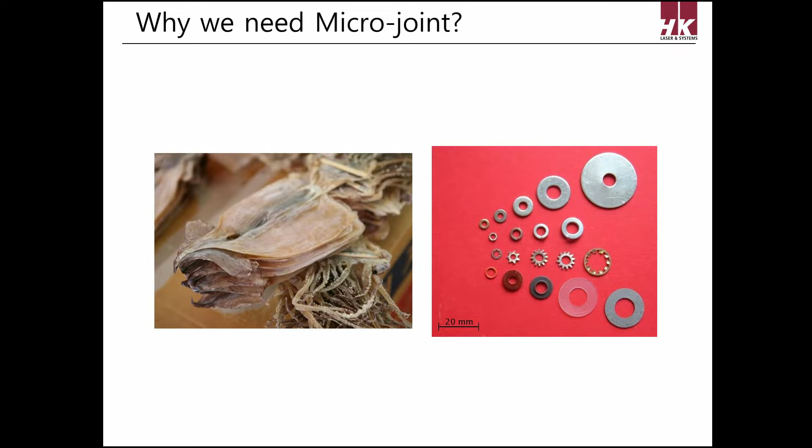As you can see, here is dried squid in the picture. Material that is hard and stiff can also be easily twisted and deformed by heat, like dried squid. Small parts on the side can fall between the grid. So use microjoint to attach small parts or prevent heat deformation. In other words, we call this a joint.

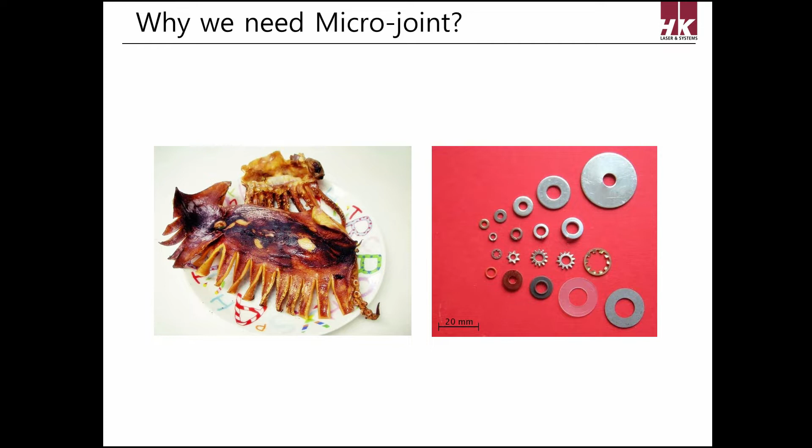As shown in the picture, these parts should be attached by microjoint: 1. Thin and long parts that need to minimize heat deformation. 2. Small parts, to prevent loss. 3. Parts that might cause head collision.

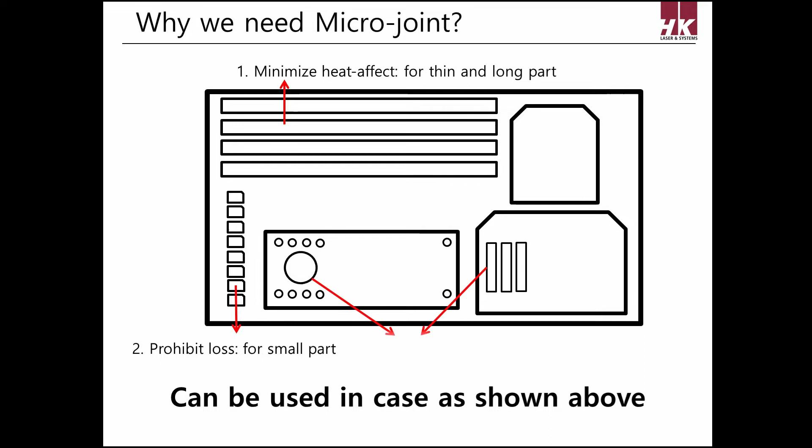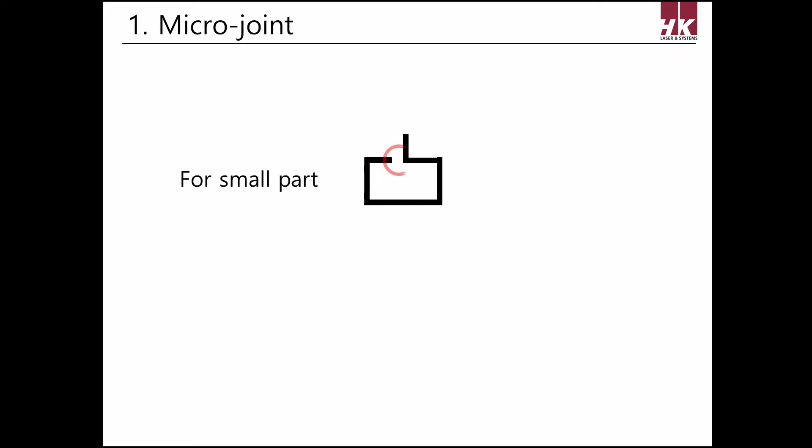As shown in the picture, if the part is small, use one joint at the end of the lead-in, and multiple joints for long and large parts.

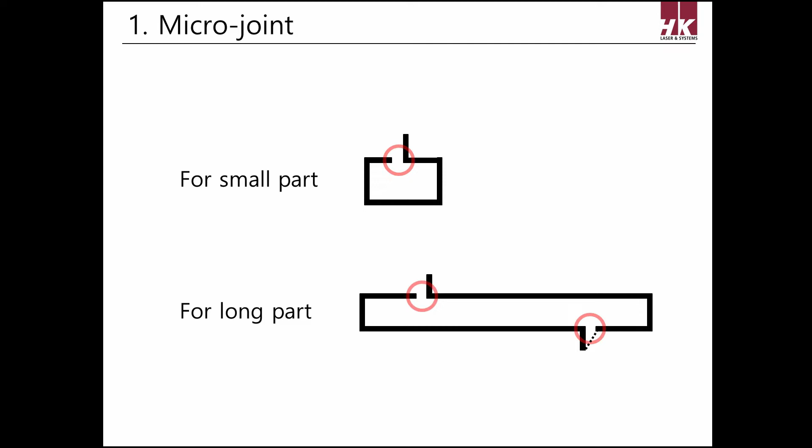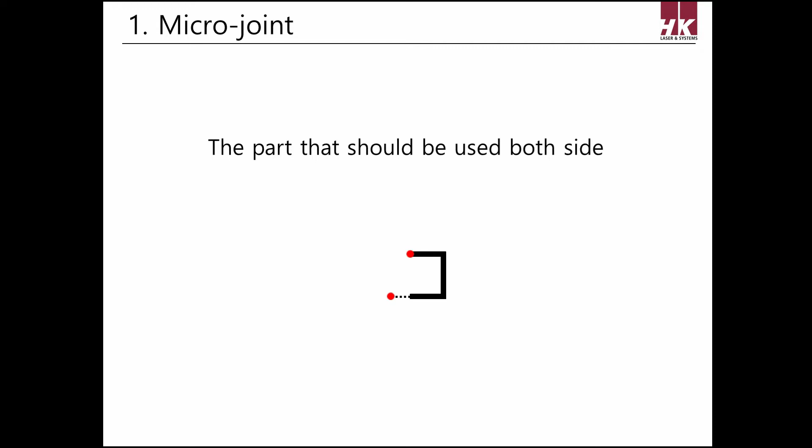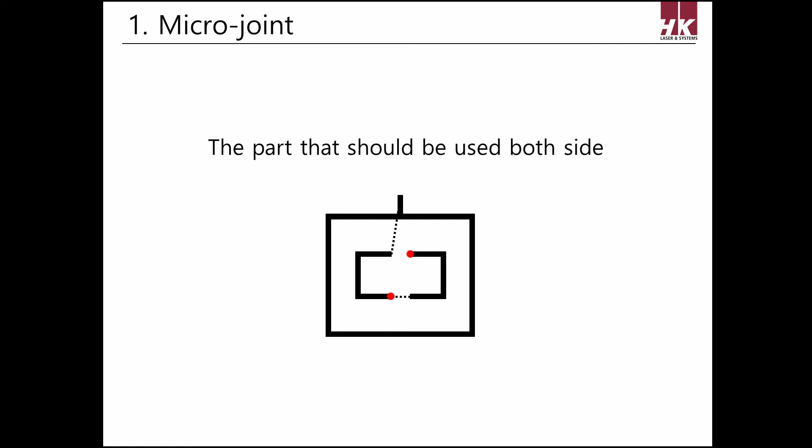In case of using both inside and outside, use microjoint without lead-in, which starts piercing at the next starting point. This kind of microjoint is applied when using common cut, or when two parts are too close. Especially, using microjoint on a curve may cause errors in a fiber machine.

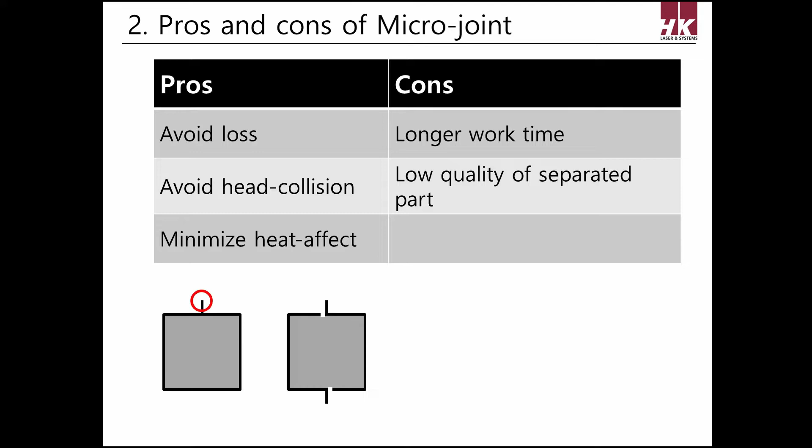Like this, the pros of using microjoint are preventing loss, preventing collision, and minimizing heat deformation, and the cons are more work time due to more piercing, and low quality of the joint when separated, because the joint is an uncut part.

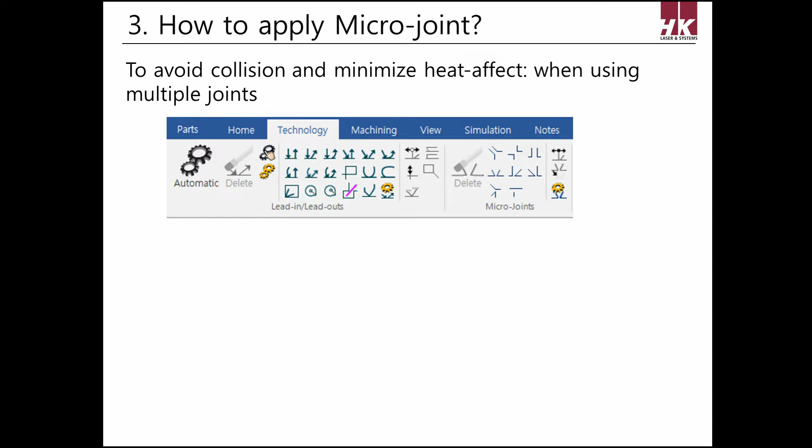Next, let's find out how to apply microjoint. To apply microjoint in general, use the microjoint function in the Technology tab of the Drawing or Nesting and Machining screen. To apply multiple microjoints, input them in the Drawing screen.

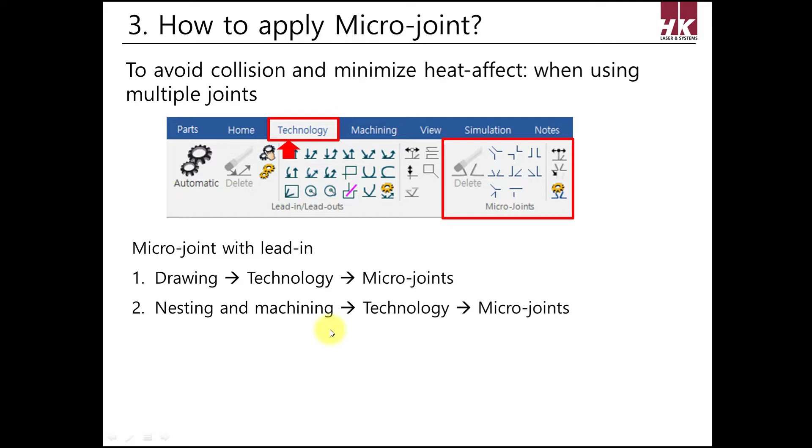Let's find out the detailed functions of microjoint in the Drawing or Nesting and Machining screen first. Microjoint is in the Technology tab of both the Drawing and Nesting and Machining screens. Versions later than 40 will show the setting window on the right. The width value of microjoint is S, which is normally set to 0.3 to 0.8.

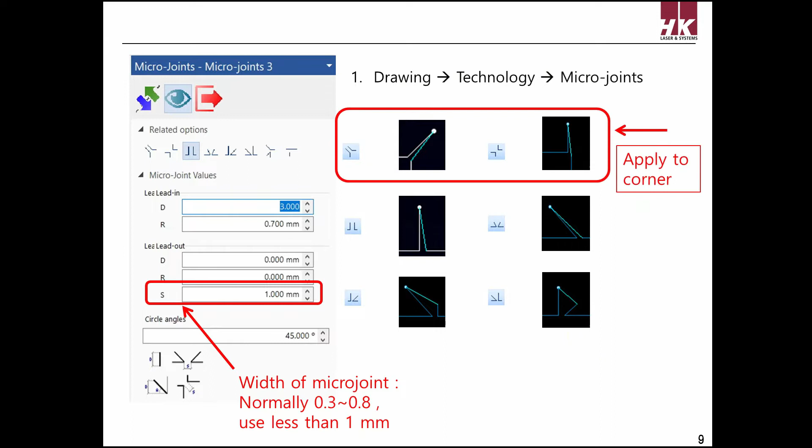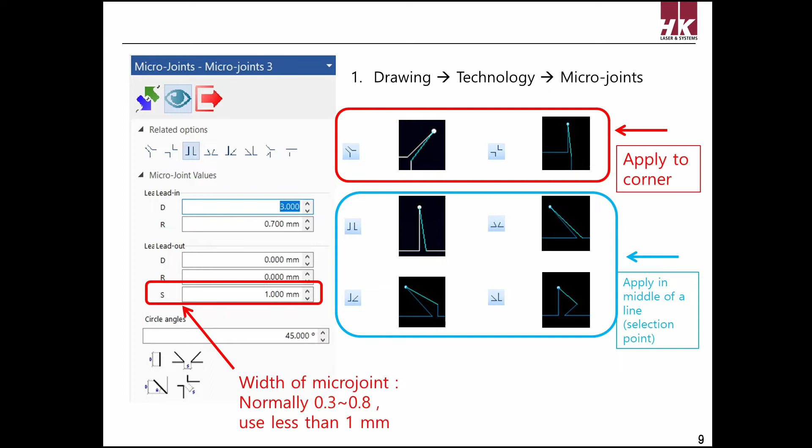There are several kinds of microjoint, divided into sticking to the corner and the middle of the line. Normally we use microjoint type 3, which can be set in the middle of the line. This is used before machining when applying multiple microjoints, or for shapes that must be attached. Let me show you how to apply it in the program.

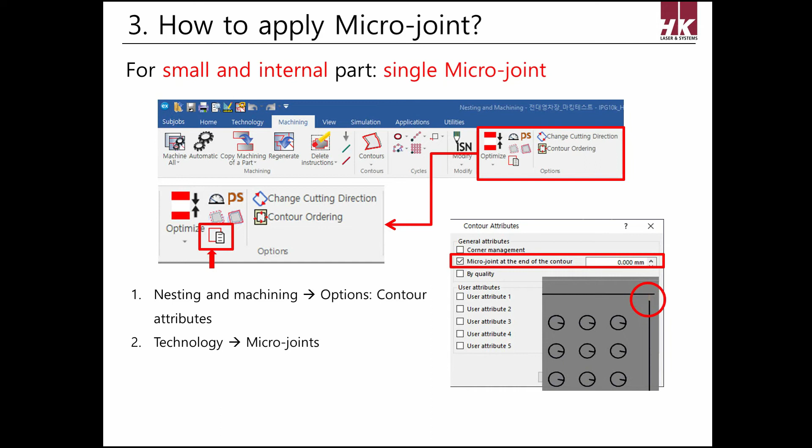It can be applied and deleted altogether, even after machining. Let's use it in the program.

Next is how to apply microjoint without lead-in, which can be applied in the Nesting and Machining screen. Go to Modify in the Machining tab to apply microjoint. Microjoint in Modify can be applied by inputting the width and selecting the position in the middle or picking a point, and is not generally recommended. This microjoint is applied without lead-in, so it will start piercing at the start point of the next part. So, this is recommended when trying to attach microjoint on a common cut line.

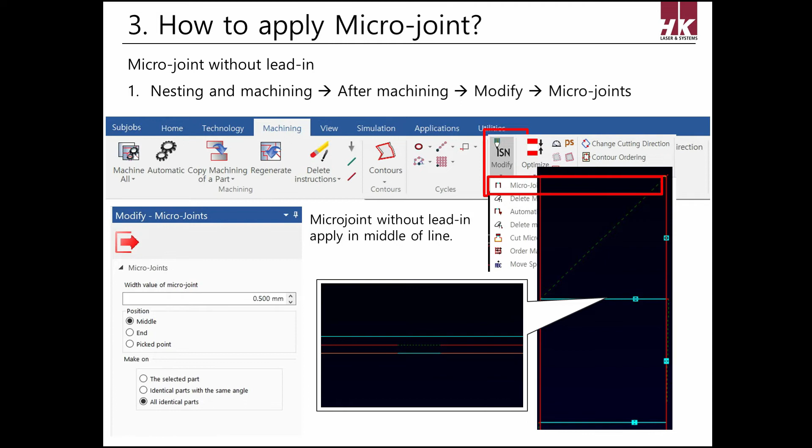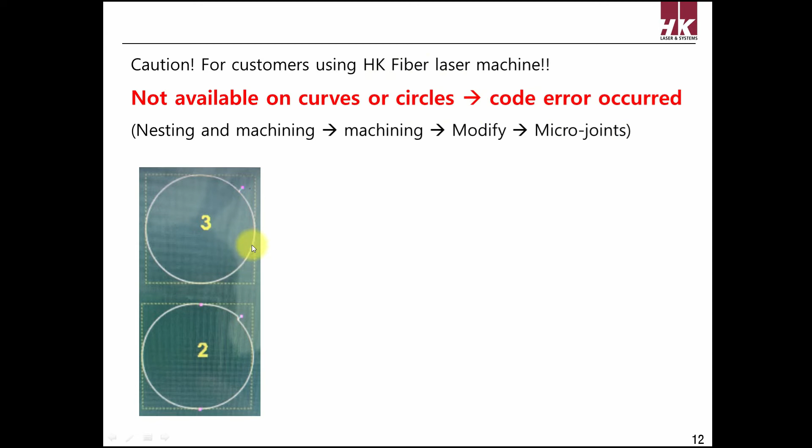For customers who are using our fiber machine, using microjoint without lead-in on an arc will cause a code error and cutting failure, so please be aware of it. As shown in the image, this is a case of cutting failure from using microjoint without lead-in on an arc. For arcs, please use the two methods I told you about earlier. Then let's apply it with the program.

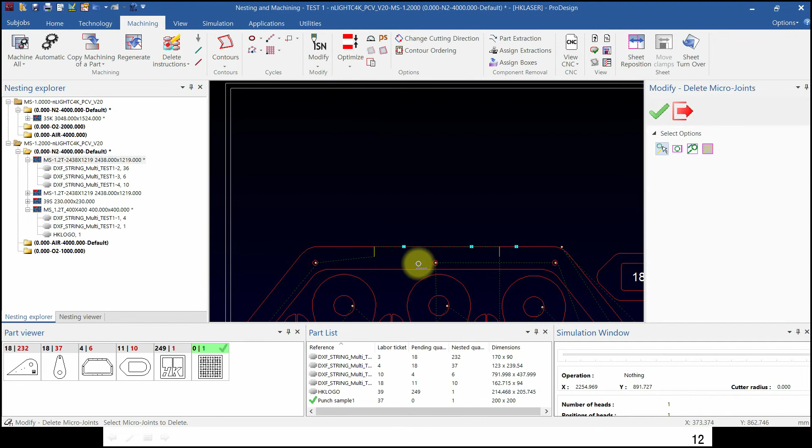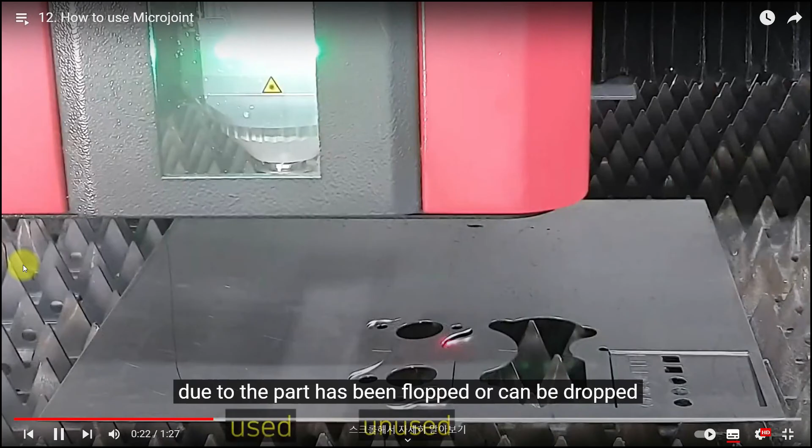Besides this, our machine can apply microjoint automatically. The function name is automatic micro-joints, which can apply them altogether by setting limits of maximum and minimum contour size to avoid head collision, like this.

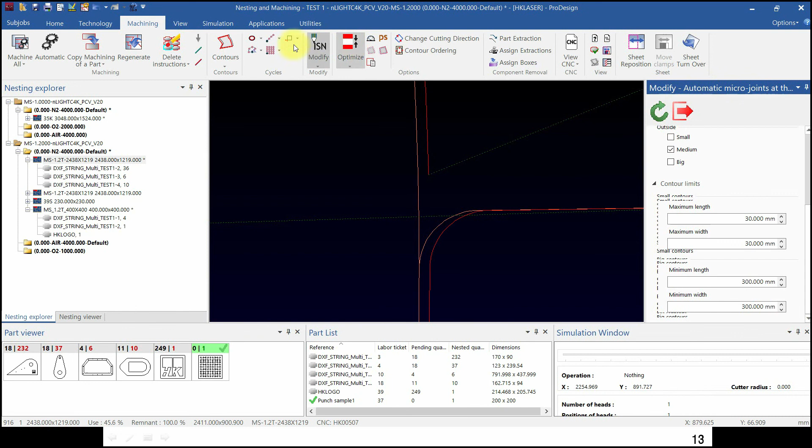There are many ways to apply microjoint, which means it is a commonly applied technique when cutting. So please know these functions well.